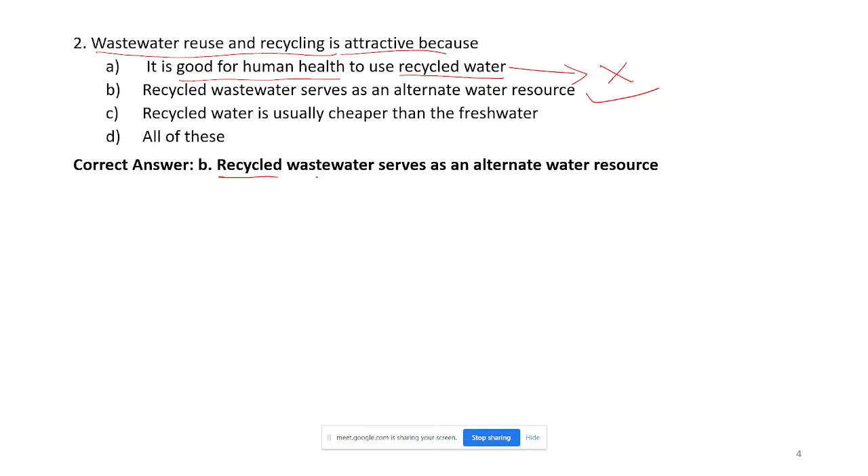Option B says recycled wastewater serves as an alternate water resource. This is true. Nowadays the major term we are hearing everywhere is water scarcity. All over the world this is becoming a major problem - we are getting water scarce. Reports say that soon in the near future many cities in our country will become water scarce. So recycled wastewater can be thought of as an alternate water resource. Therefore B is the correct answer.

Let us see option C, which says recycled water is usually cheaper than fresh water. That is wrong because we cannot just reuse wastewater directly - we have to recycle it with proper treatment. That recycling step, or the treatment technologies and methods involved to recycle and reuse the water, is quite a costly process. Therefore it is not cheaper than fresh water, and B remains the correct answer. Any doubts, anyone?

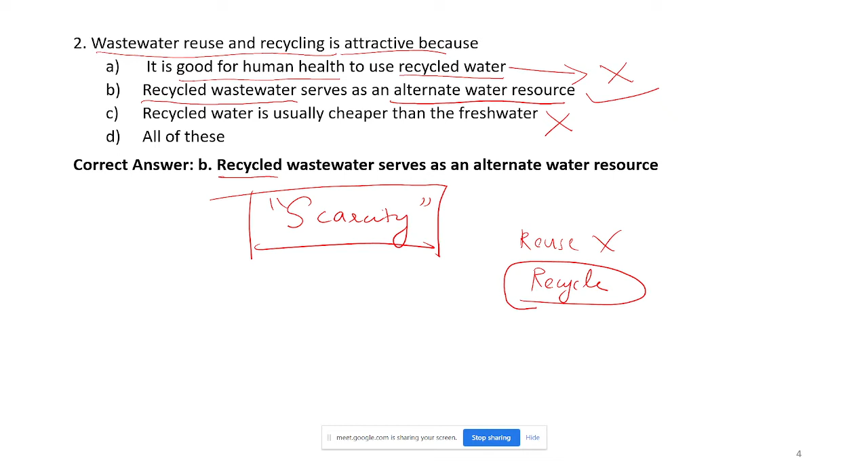No, it's okay. Let us move on to the next question. In this question you have to guess the answer, I have not provided the answers.

The third question is the correct flow of large wastewater recycling system combining various stages. The stages of recycling are provided in series, you have to choose the correct series of operations. Answer is A. Any other answer, anyone?

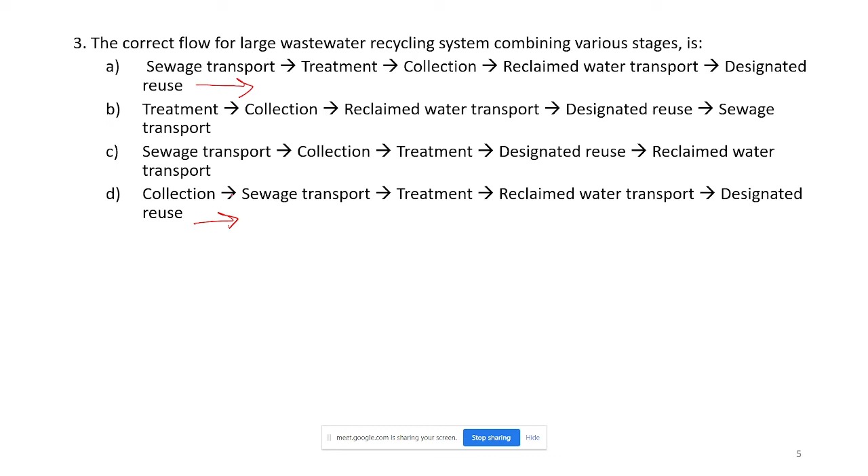Let us see the answer. Option D is the correct answer. So the first step involved in recycling is collection of wastewater, then it is followed by sewage transport. The recycling plant would be at a far away place from the collection unit, so it has to be transported, hence sewage transport. Then it is followed by treatment, the third step. After treatment, this reclaimed water should be transported back to the community for use - that is the fourth step.

Then fifth step is designated reuse. There are different types of reuse options available. Can anyone take an initiative in telling what are the different ways in which we can reuse the reclaimed water? Madam, agricultural activities and any construction jobs, and any kind of gardening or anything like that.

Any other ways? Madam, we can use it in process also again. What type of processes? Dilution or some merging process, also we can use reclaimed water based on parameters also we can consider. Industry process also, industries. Yes, these are some of the options in which we can reuse the water. Very good for your response.

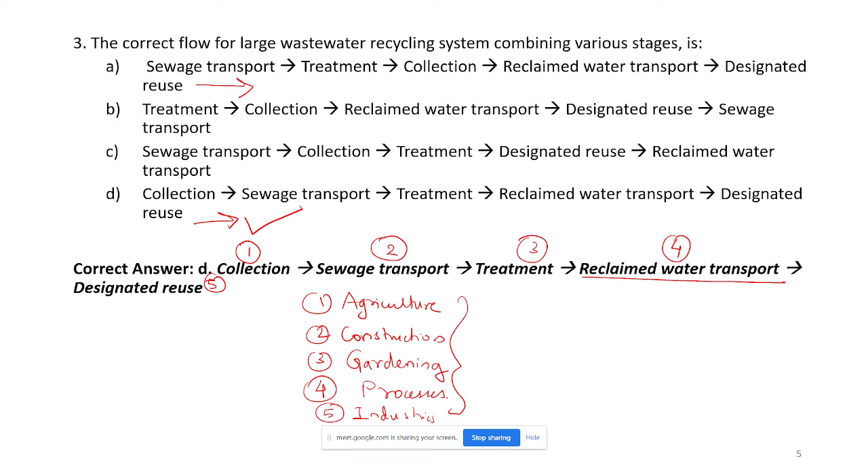Is there any doubt in this question? No, ma'am. Then let us proceed to next question.

Next question is, which of these pollutants are of major concern for recycling wastewaters? A, suspended solids and sediments. B, nitrogen and phosphorus. C, emerging contaminants. D, biodegradable organic matters. I have got the response as C. Any other option, anyone?

Let us see the answer. Yes, you are correct, option C is the correct answer. Right now we have mechanisms to remove suspended solids and sediments by primary sedimentation, secondary sedimentation, and grit removal processes. Nitrogen and phosphorus can be removed in tertiary treatment methods. Biodegradable organic matters, that is BOD, COD and all, are taken care of by biological treatment.

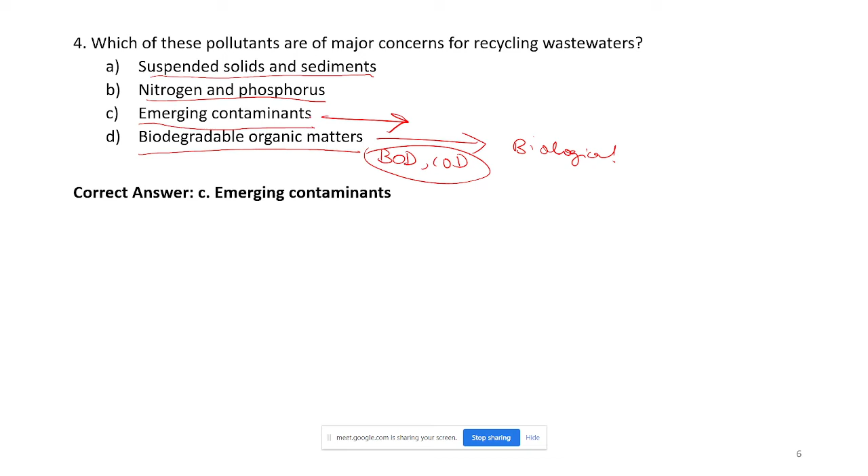So the remaining thing is emerging contaminants. Does anyone know some examples of emerging contaminants which are becoming a major issue nowadays? One is pharmaceuticals. Exactly, pharmaceuticals and pesticides. Maybe. Yes, you are correct. Any other pollutant?

So all type of industrial contaminants, any kind of oil contaminants, hydrocarbons like that? Yes, industrial chemicals, then hydrocarbons - all these come under this. Then have you heard about microplastics? It is considered a big issue, yes, it is considered as one of the major classes of emerging pollutant recently by environmentalists.

Microplastics means fragments of smaller plastics which are present all over the world, everywhere. Its presence is reported in all aquatic systems, terrestrial systems, even inside the human body. So it is also one of the major pollutants present. Actually, my research area is focused on this pollutant, microplastics. So it is also one of the major classes of emerging pollutant.

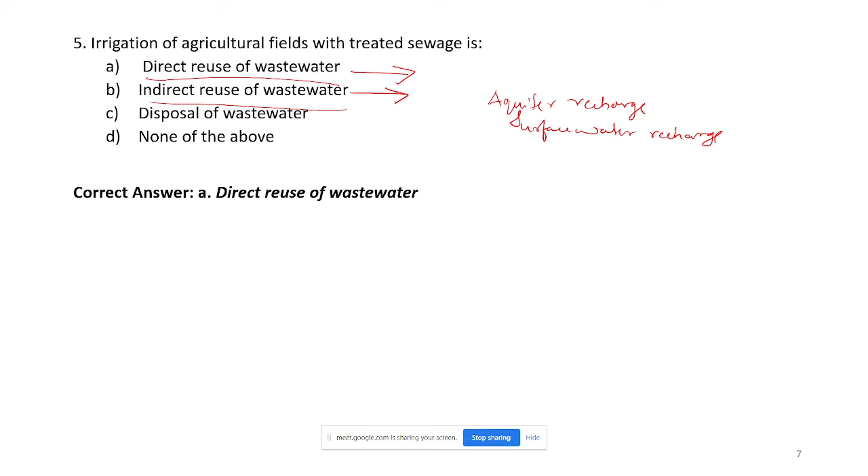Any doubt? Okay. Shall we move on to the next question? Yes, okay.

We cannot directly reuse treated sewage for drinking and cooking. Even though it may be 100% recycled, coming after RO treatment and all, there are many factors associated with directly using it for drinking and cooking. Various social factors, economic factors, and safety aspects come into picture. So it is not advised to directly reuse wastewater for drinking and cooking.

Is it clear? Yes, ma'am. Okay, let us move on to the next question.

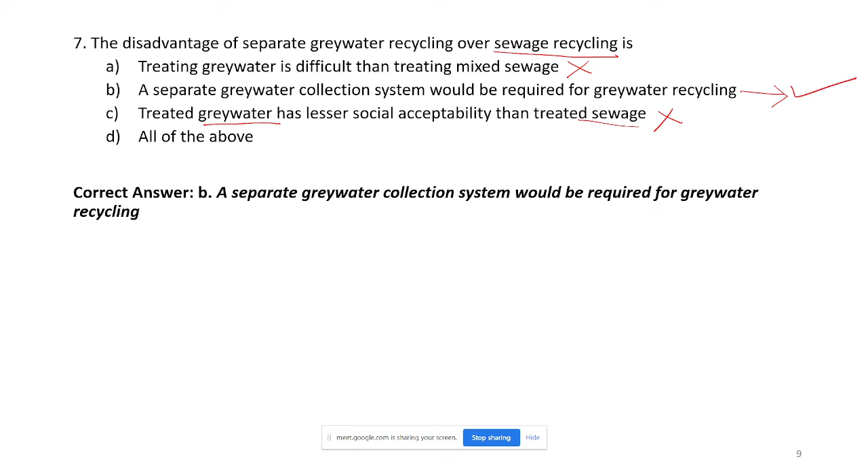In industries, mostly, nowadays the terms used are zero discharge or circular economy, ZLD.

Anyone has to say anything? Okay, while speaking about industrial effluent, nowadays we environmentalists are stressing upon two terms: one is zero discharge and the other is circular economy. So what it means is that nowadays many industries are coming up with the term zero discharge.

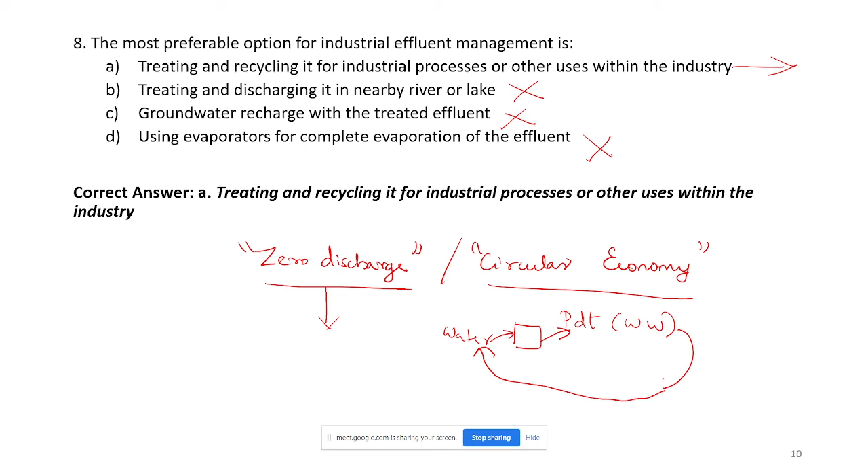Any doubt, anyone? Okay, no. Let us move on to the next question.

The next question is: groundwater recharged with treated wastewater is an example of A. Wasting of treated water, B. Indirect reuse of reclaimed water, C. Direct reuse of reclaimed water, D. None of the above. Student responses varied between B and C. Any other opinion, anyone?

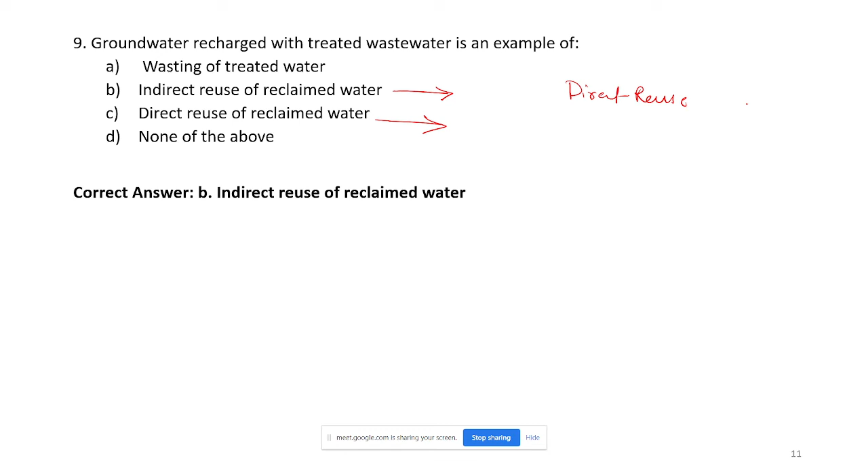Let us see the answer. The answer is B, indirect reuse of reclaimed water. In the lectures you would have learned about two terms: direct reuse and indirect reuse. In direct reuse, we are mainly talking about recycling the water for uses like irrigation or other agricultural purposes, industrial purposes, or gardening - directly reusing the water. In indirect reuse, we are mainly talking about aquifer recharge - we are not using it directly, we can use the term storing, as in aquifer recharging or surface water recharge. So all such things come under indirect reuse. The question is about groundwater recharged with treated wastewater - this is similar to, more or less the same as, aquifer recharge. So the answer is option B, indirect reuse of reclaimed water. Is it clear? Yes ma'am, shall we proceed?

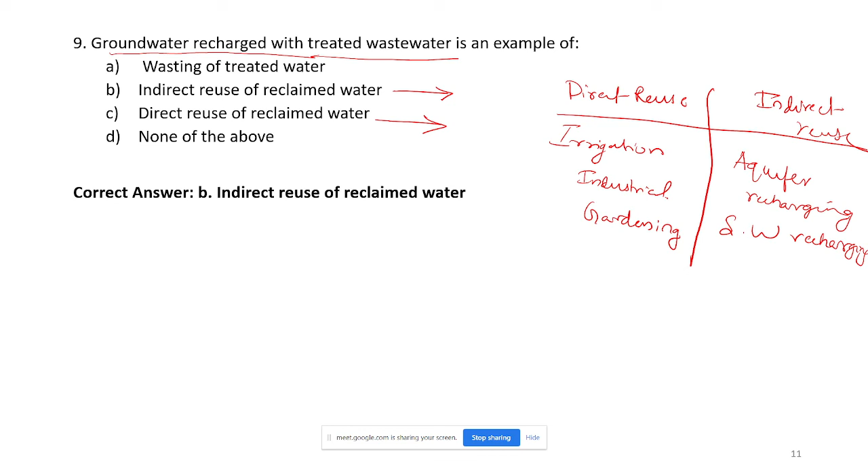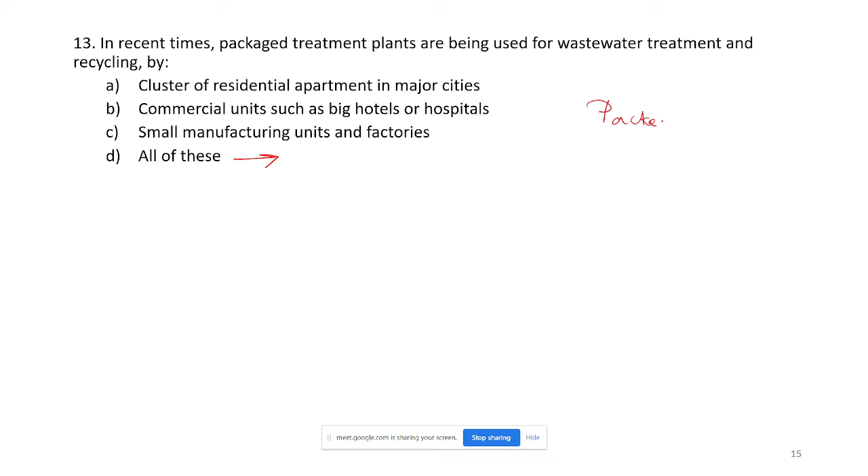What do you mean by packaged treatment plant? They are basically small units brought together and installed at the site. It's basically unit wise, and if you want to expand it, you can buy another unit and install it next to it. So it is basically precast or pre-made small treatment plants. Is that what you mean?

Yes, it is precast or pre-manufactured treatment plants, and they are just brought and installed at a particular site where water treatment or wastewater treatment is needed. It could be of any type, like SBRs, ASPs, trickling filter models, even membrane bioreactor types are there. So basically they are pre-manufactured, brought to a site, and installed as small units. That is what is known as package treatment plants.

So while coming to the answer, let us see. D is the correct answer. These could be installed at a cluster of residential apartments, commercial units such as big hotels or hospitals, or small manufacturing units and factories. So all of these are correct. Any doubt? Anyone? Okay, madam.

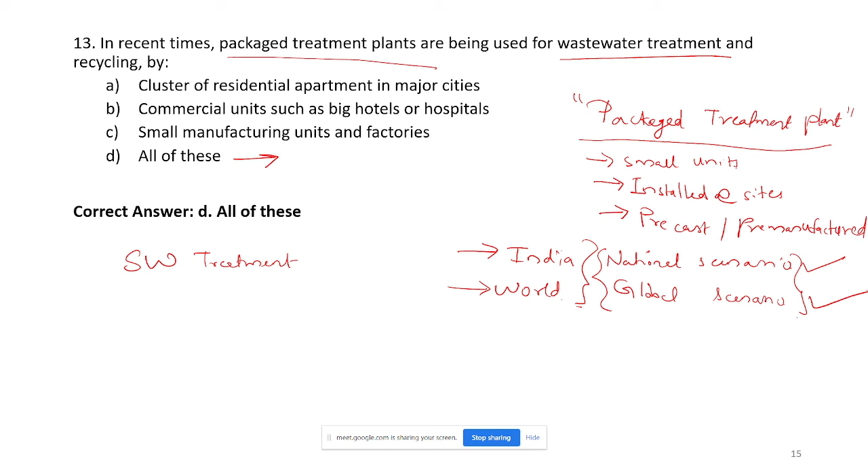In decentralized management of wastewater: A, city scale wide network of sewers is required for wastewater collecting and transport. B, collection, treatment and reuse is done at or near the point of generation. C, treatment is done at an off-site location outside the settlement. D, all of this.

Madam, answer is B. B, okay. B, ma'am. D, sorry, B. Okay, any other answer, anyone?

Let us see the answer. B is the correct answer. So we have two types of wastewater management, which is centralized and decentralized.

Can you tell me the difference between these two? In the case of centralized treatment plants, we have to construct a common effluent treatment plant far away from the residential place, and make a network arrangement for transporting the effluents from various parts of the residential places and treat it commonly. But in the case of a decentralized system, small treatment units are installed near different places, and it is treated independently based on the type of effluent generated there. That is a decentralized treatment system.

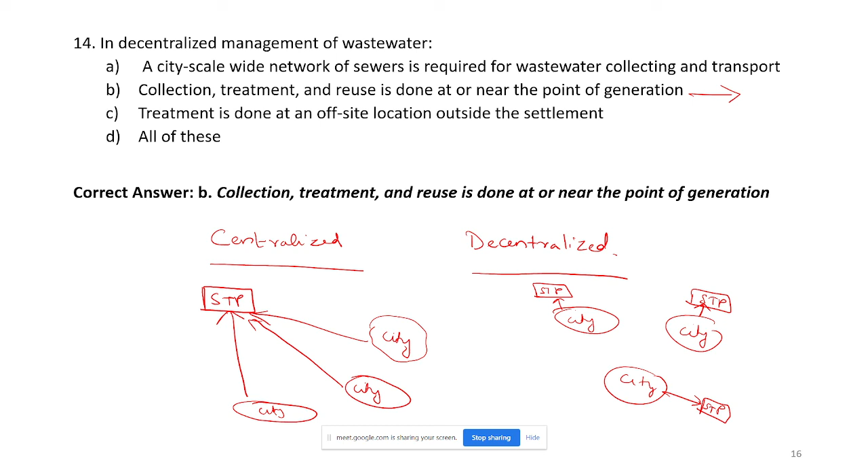Very good. Is it clear? Yes ma'am. Okay, any doubt, anyone? Shall we proceed to the next question? This is the last question.

Long distance transport of wastewater is the major issue associated with the centralized system for wastewater management. Is it clear? Yes madam. Okay, so that is the last question for today's class.